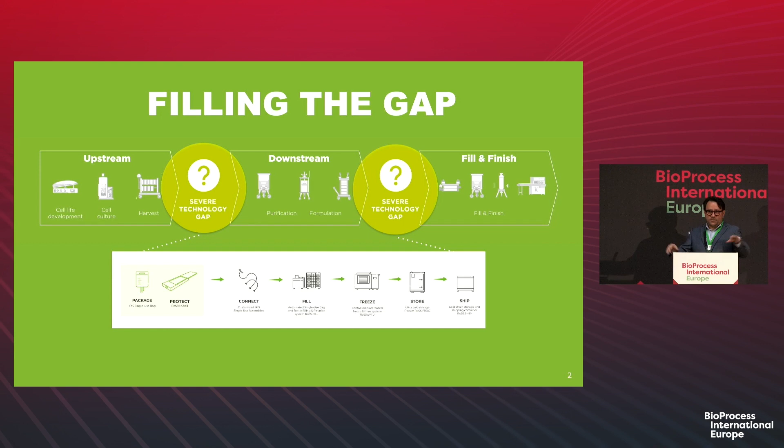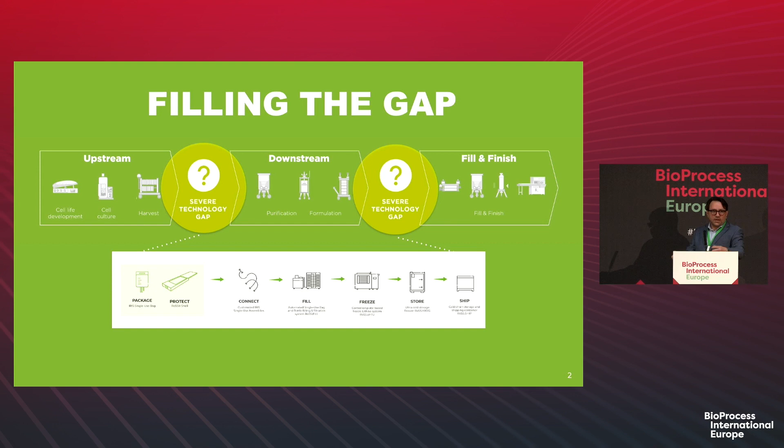The gap between downstream and fill and finish is probably more evident. There are very nice solutions in the market, like the one from Lonza, where I worked before, where you standardize and offer a one-stop shop having drug substance and drug product production on one site. However, this isn't always the case, and there's good reasons why sometimes it isn't. Sometimes you have a huge amount of drug substance and want to distribute it within different parts of the world, then do fill and finish closer to your customer. Some of the COVID vaccines we recently saw are a good example of this kind of supply chain. Although it's sometimes a good idea to have a centralized one-stop shop, sometimes it's also good to do the opposite. Therefore, in our view, there's a gap between downstream and fill and finish.

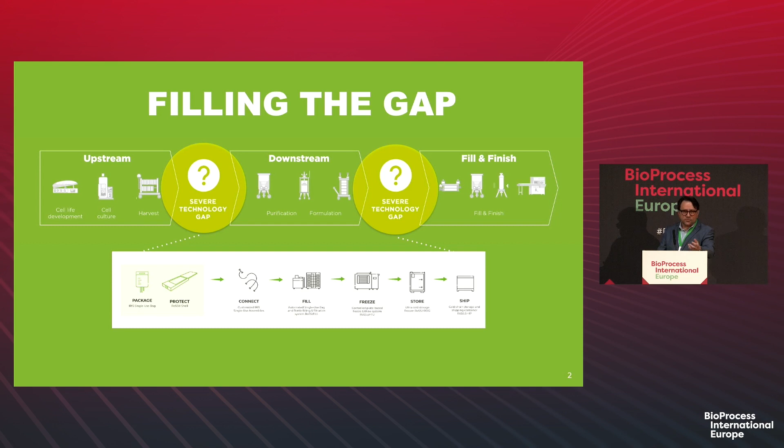And that's where we come into play. There's a lot of different solutions we offer our customers to fill these gaps, to help you cope with these kinds of situations. I'm going to present 3 very short case studies to give you a flavor of the kinds of things we do with our customers to help them fill these gaps.

So the first case is managing fluids. We all know the Annex 1 requirements, and we know managing sterile products can be challenging, and also expensive and resource intensive on top. However, there are other ways to do that. You can use technologies like this one - we're proud to be one of the market leaders in these kinds of solutions, where you can do aseptic filling in a closed system in a simpler way, so there's not always a need to use an isolator.

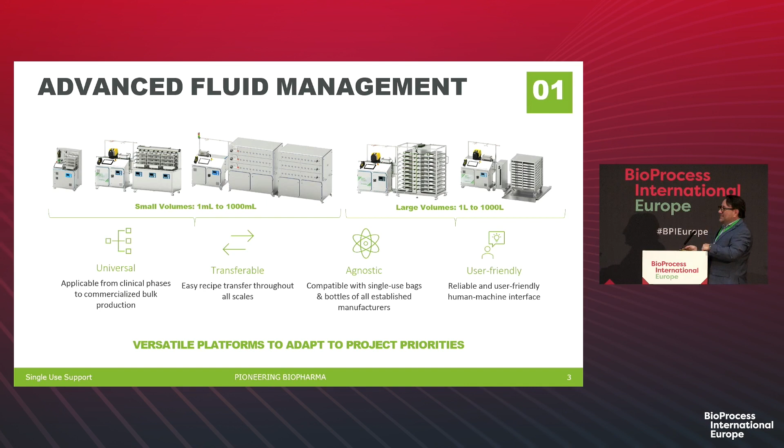This is a real study where a customer reached out to us saying, I need to fill bags or bottles for a drug substance in an isolator, and I don't like isolators. I said, well, I don't like isolators either, although sometimes it's necessary to use one. We started a project and compared the two. He told me, please help me sell the idea of using a different technology instead of an isolator. I said, as long as I can use the slides for conference, I will do it.

For example, the background area you need for an isolator is higher than the one you need for a closed system. The type of utilities you need are very stringent. You need hydrogen peroxide vapor, different power, compressor, everything.

Our machines are plug and play. You can put one of these machines in this room and do aseptic filling here. I'm not kidding, there are customers who do aseptic filling in black areas.

You also have a very manual process using an isolator. It's not easy to actually automate an isolator process. In our case, everything is automated. You can even generate batch records, manage users, export all the different data you generate, and increase traceability.

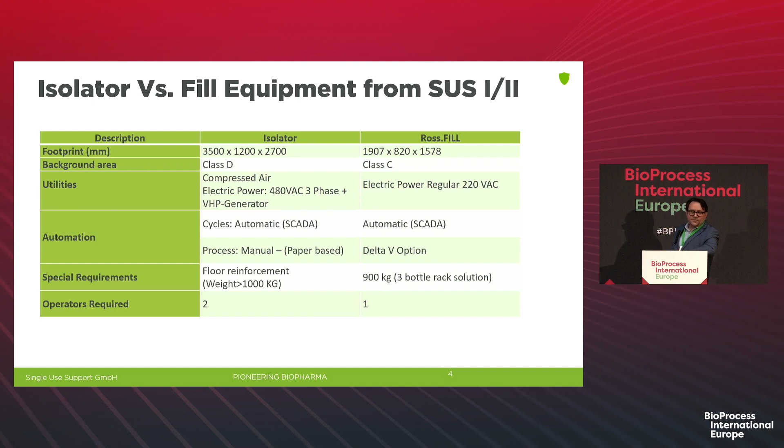I'm not going to give you all the details because I want to have a conversation with you about it. Feel free to reach out to me afterwards, and I can tell you much more.

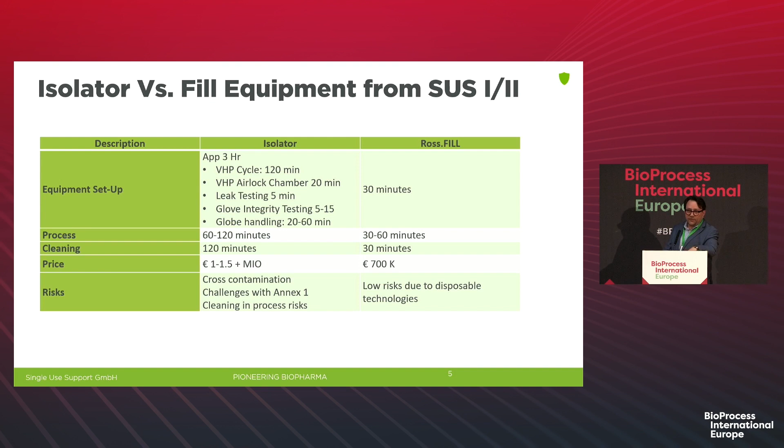Sometimes you can scrap only one bag, and then after that, you're safe. But not everything that shines is gold - there's one limitation I want to share with you. For using these kinds of systems, at the moment, you are limited to using bottles and bags. You cannot use vials. If you want to use vials, reach out to us, and we are very happy to engage in a co-development to develop an automated closed system for filling vials. But we don't have it yet - we're working on that.

The second case study I'm going to present today is freezing. We also offer a wide variety of freezers in different scales, and some of you in the room are already using our freezers - thank you for coming, by the way. We're developing a process to control and freeze drug substance in a more reproducible, more product-friendly way. I know, for example, we have a couple of them at Lonza, especially in Visp.

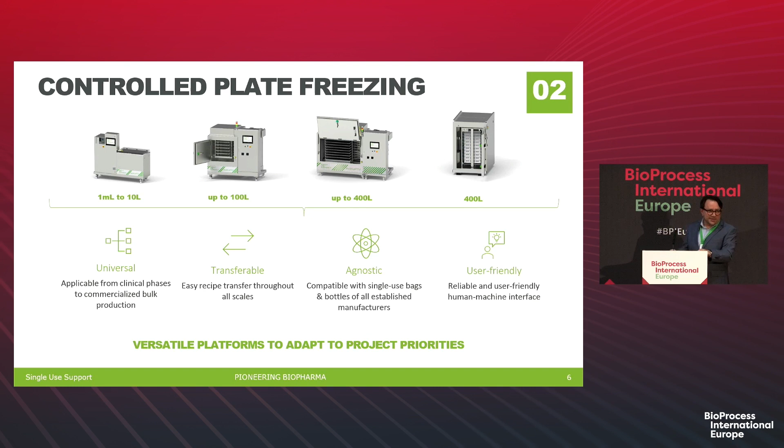So some of you will say, what's wrong with a blast freezer? Well, there's nothing wrong with it, but there's much better use, there are high advantages, right? So let me show you this slide.

You might probably also have some pH differences within a bag. So stop treating your very kind product so badly and use plate freezers, please. Let me show you something.

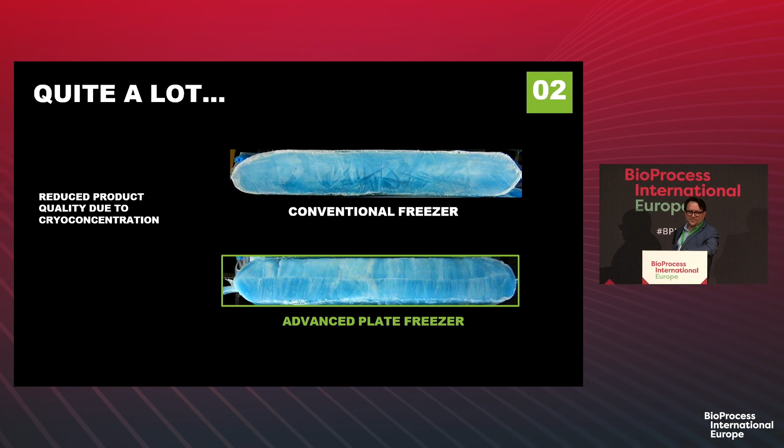When you use these kind of plate freezers, what happens is you actually freeze from bottom to top and from top to bottom, and these two fronts meet in the middle, right? You not only control the freezing more accurately, but you also do it faster. And the beauty of these systems is that you can do the same with the thawing and also save time on the thawing side.

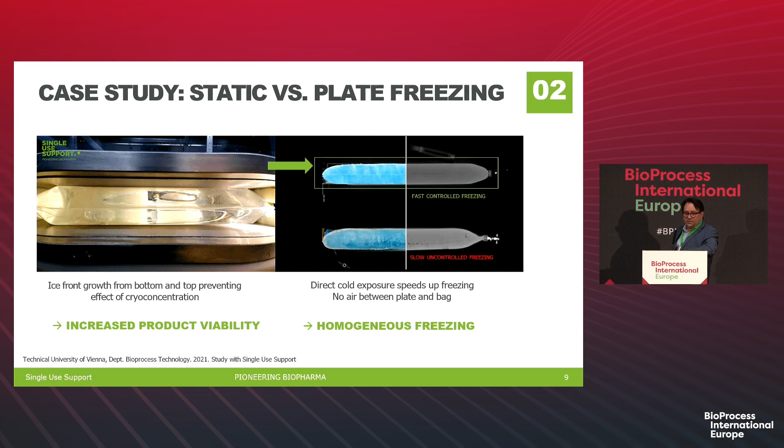I can show you a video offline where you see how this freezing procedure works in reality. There's also some data here, and please, if you find a better way to present this data, let me know, because I'm not so happy with this data.

Basically what we did here was to freeze a big bag using both technologies, take some samples, drilling out some holes in the bag, and then measure the concentration range of the drug substance at different points of the bag. As you can see, the conventional freezer has a huge variability compared to the more advanced plate freezing technologies. That actually matches very well the first picture I showed you, with all these differences in color between the conventional and the advanced plate freezer.

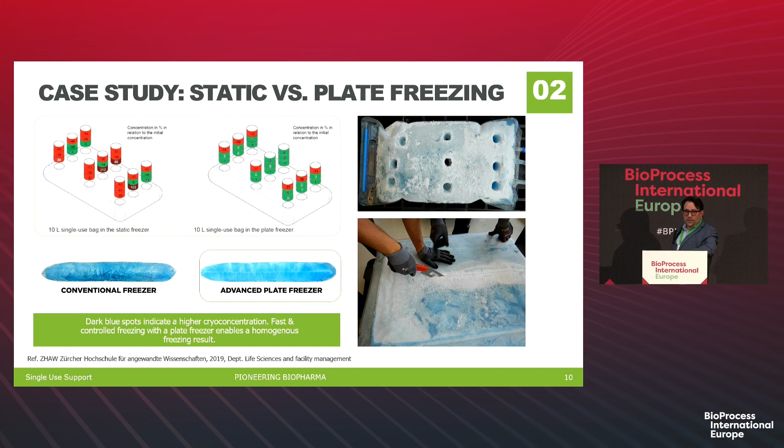There's much more to say here, so feel free to reach out to me. My goal today is to make you curious, to provoke you maybe, and engage with you in a conversation about whether this could eventually be beneficial for you.

But there's another third business case I want to present, a case study, which is the fact of using bags. I know there's still a lot of resistance to change from bottles to bags in some cases, because bags, let's be honest, they break. But there's no reason — don't blame the bag for that, just protect the bag, please. So the bag itself is a very bad packaging material to be transported from one place to another.

As we've seen in the first slide, there's a lot of transportation and handling needed to cover these gaps. So if you freeze a bag like this one at temperatures roughly -60 to -80, this thing is like glass, as you know better than I do. They break, and you only actually find out it breaks when you're ready to produce and you thaw the bag.

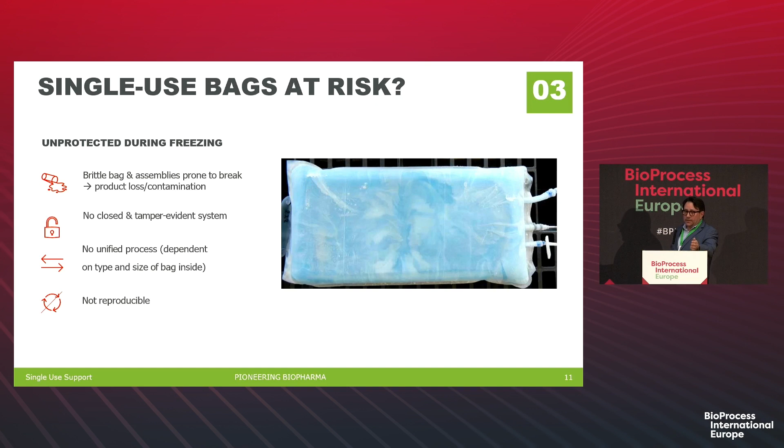So what we're offering here is a very simple secondary packaging material, the RoSS Shell, which is in use in some of your facilities as well, to prevent this breakage. It's a very simple construct where you have two stainless steel lids up and down, and a thermoplastic foam material surrounding the bag, and the whole construction is made specifically for the bag of your choice. It's not a standard one — each type of bag has a different type of shell.

We are so flexible here that we offer shells for all the big manufacturers in the market, although we also sell bags, to be honest. You can take the bag of your choice, even if it's from a competitor, and then protect it with this secondary material we call the RoSS Shell. We understand we're not the only suppliers of bags in the market, and you probably have a lot of data using bags from other suppliers. We don't want to push you to change your bag, we want to help you. We don't want to make your life more difficult. So that's something you can use.

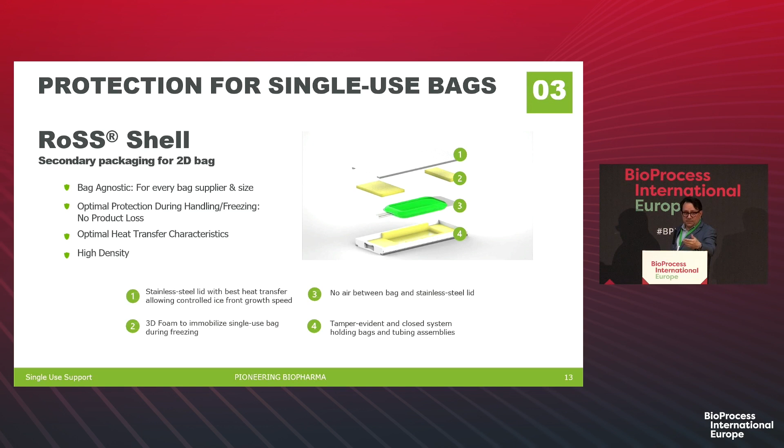There's also a bunch of extra benefits to using these shells, especially in combination with the plate freezers, because then the freezing process and heat exchange for freezing and thawing is going to be more effective. So you're basically having a very nice side effect on top of protection, which is even more control of the freezing and thawing procedure.

These are real data from a customer of ours that was using naked bags in the past and then changed to our bags. They were losing roughly 600,000 dollars a year in bag breakages. These are direct losses, so we're only talking about the losses of material when the bags broke. We're not talking about the losses of sales of final product, which might be probably even higher. They didn't like to tell us that. But the losses of material were 600,000, right?

So it makes a lot of sense to invest a bit of money in protecting your bags, because in the end it pays off. If you wish, I can show you some data that tells you using these RoSS Shells will pay off roughly after 3 months of usage, depending on the volumes you have. So that's also something to consider.

I'm aware that all of you here are manufacturers, and probably more worried about things like glycosylation, protein structure, type of bioreactor, efficiencies, and so on. But please don't forget these kinds of things. This is a small piece of the pie you manage directly, I'm aware of that, but it's a very important one. There's a lot of efficiencies to gain here, a lot of headaches you can avoid by using our technologies, although it's a small piece of the pie. But it's also low-hanging fruit. You don't need to make too many changes to actually have a lot of benefits.

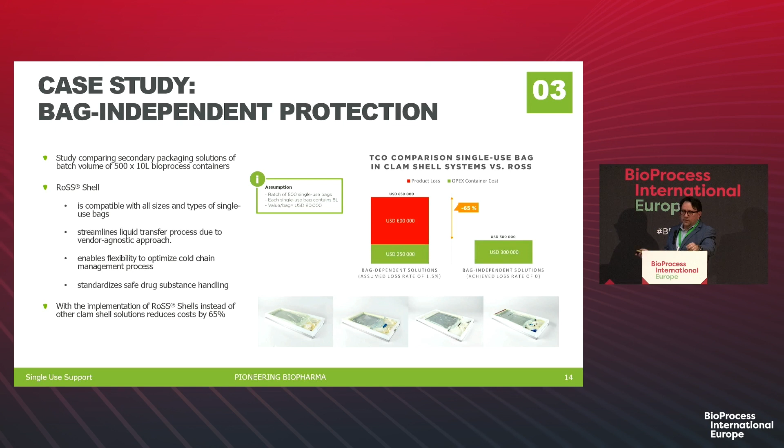My goal here is to make you aware that although you're not thinking about these things every day, because you have probably bigger problems to solve, just dedicate some time to think about these things, because it's probably a good idea. That's all I have to say, but I will be happy to answer your questions. Thank you very much.

Don't forget the socks.

You think like you were thinking about different things, so you were also very interested. Can you share your thoughts with us? Please go ahead. No? Okay.

Thank you, it was an interesting presentation. The RoSS Shells, is the purpose of that for single use, or can we use it multiple times? We have both variations of the shell. The first generation of our shells was the single-use one, and depending on the case, it makes a lot of sense for you to either use single-use or multi-use.